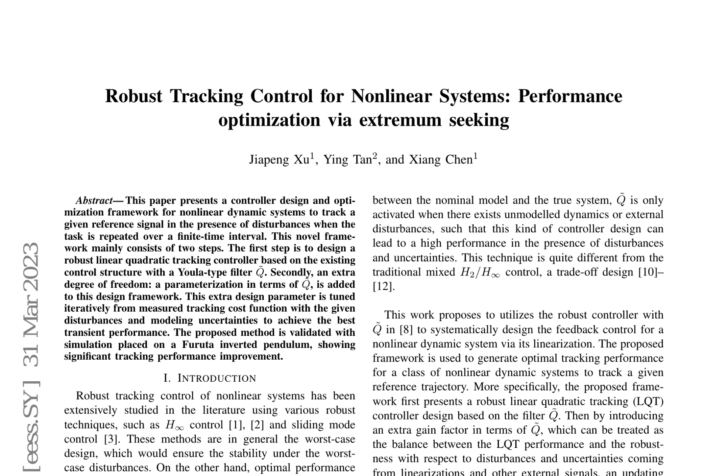The effectiveness of the proposed framework is validated through simulation on a Furuta inverted pendulum, a highly nonlinear and unstable system. Results demonstrate significant transient tracking performance improvement compared to standard LQT and H∞ controllers. The optimal gain factor is shown to be dependent on the nonlinear dynamics, reference trajectories, and disturbances, highlighting the importance of adaptability in robust tracking control.

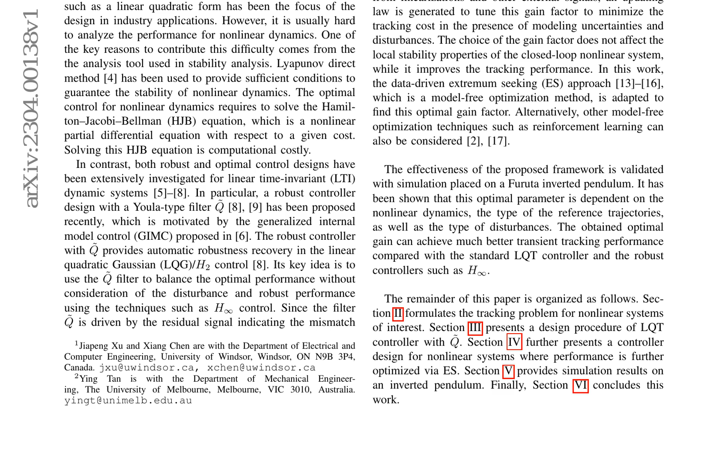The proposed framework offers a robust and adaptive solution for tracking control of nonlinear dynamic systems, with potential applications in various fields, including robotics, aerospace, and process control. By leveraging the strengths of LQT and ES, this approach provides a promising direction for addressing the challenges of robust tracking control in the presence of uncertainties and disturbances.

Nonlinear systems with disturbances and modeling uncertainties are addressed through a robust linear quadratic tracking controller design. The system, comprising a nonlinear plant with a linearized form, incorporates an observer and a filter Q to enhance robustness against disturbances. The control objective is to minimize a finite-time quadratic cost function, ensuring the output tracks a desired reference trajectory. The proposed approach involves a two-step design process.

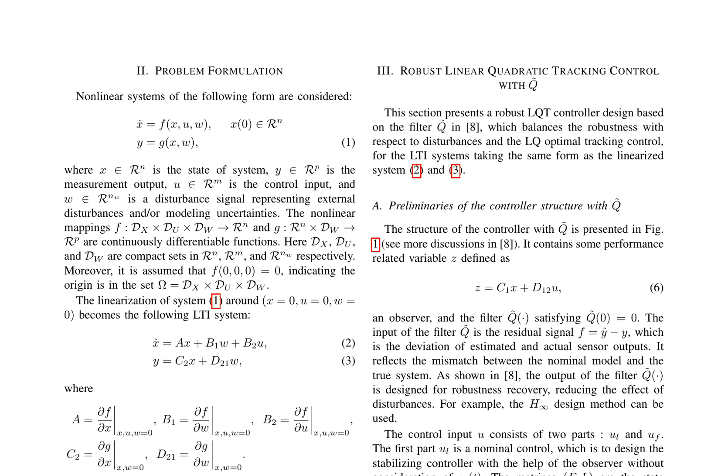First, a robust LQT controller is designed based on the Youla-type filter Q. Then, an extra gain factor is introduced to the filter and tuned using data-driven optimization algorithms, such as extremum seeking. The controller structure consists of a nominal control UL, an observer, and the filter Q. The nominal control UL stabilizes the system without considering disturbances, while the filter Q produces an additional control input UF

to enhance robustness. The filter Q is obtained using standard H∞ techniques for the augmented system with state x, e, where e represents the estimation error. The paper highlights the importance of balancing robustness with respect to disturbances and LQ optimal tracking control. An optimal control input is necessary to minimize the quadratic cost function, which is achieved through the proposed two-step approach.

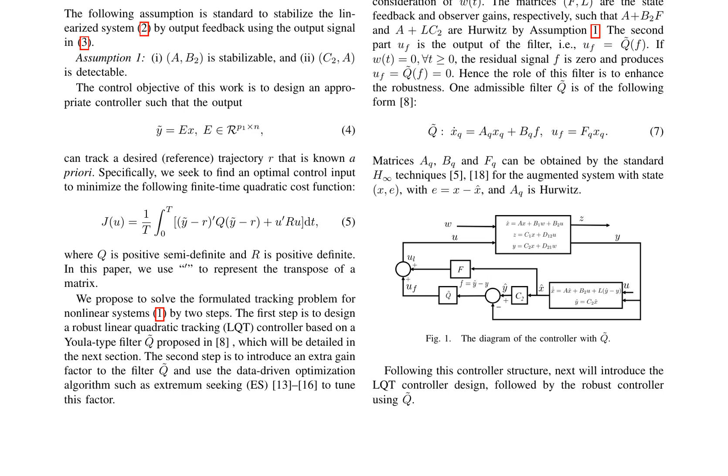The use of data-driven optimization algorithms in the second step enables adaptive tuning of the gain factor, making the controller more effective in real-world applications where disturbances and uncertainties are inevitable. The design of a robust linear quadratic tracking (LQT) controller with a parameterized filter tilde Q is presented.

For linear time invariant (LTI) systems, the optimal control input is derived using the Hamilton-Jacobi-Bellman equation, involving the solution of a differential Riccati equation to obtain the control gain F. In practice, a simplified algebraic Riccati equation can be used to obtain a time-invariant stabilizing control gain.

To enhance robustness, an extra gain factor is introduced to the filter tilde Q, resulting in a new filter tilde Q, allowing for a balance between LQT and robustness. The tracking performance index J(U) is now a function of the gain factor, and the goal is to find an optimal parameter to minimize this cost function.

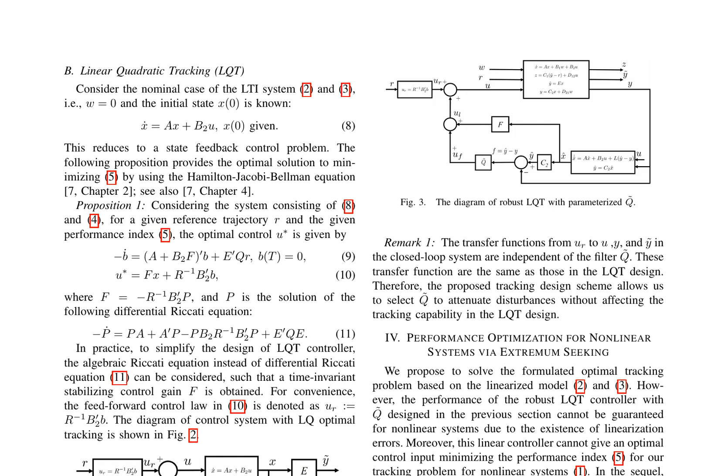To solve the optimization problem for nonlinear systems, an extremum seeking algorithm is proposed. This data-driven approach does not require knowledge of the system model and can be applied online to adjust the control parameters based on real-time data. The ES algorithm iteratively updates the parameter to minimize the cost function J and ensure optimal tracking performance.

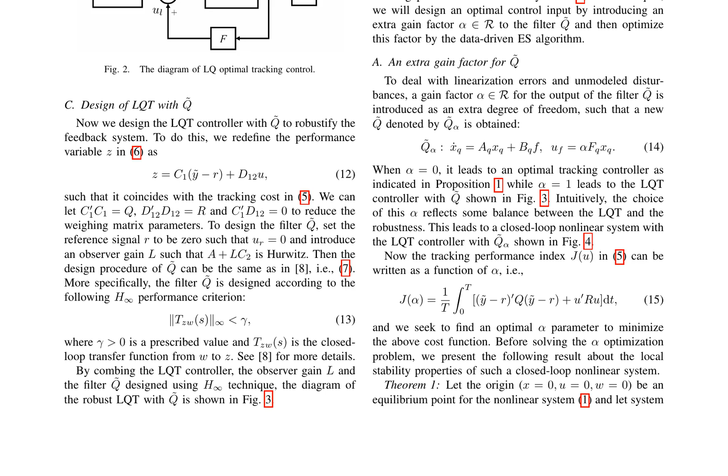Overall, the design of a robust LQT controller with a parameterized filter tilde Q is outlined, which can be optimized using an ES algorithm for nonlinear systems, offering a balance between tracking capability and robustness against disturbances and linearization errors. Designing a robust optimal tracking control scheme for nonlinear systems requires careful consideration of transient behavior in the closed-loop system.

To address this, a linearized model of the nonlinear system around the origin is first introduced, followed by the design of a linear quadratic tracking (LQT) controller with a parameterized tilde Q. Notably, the choice of this parameter does not impact local stability properties but significantly affects performance, particularly in transient phases. To optimize performance, a data-driven extremum seeking (ES) algorithm is employed to tune the parameter for a given disturbance.

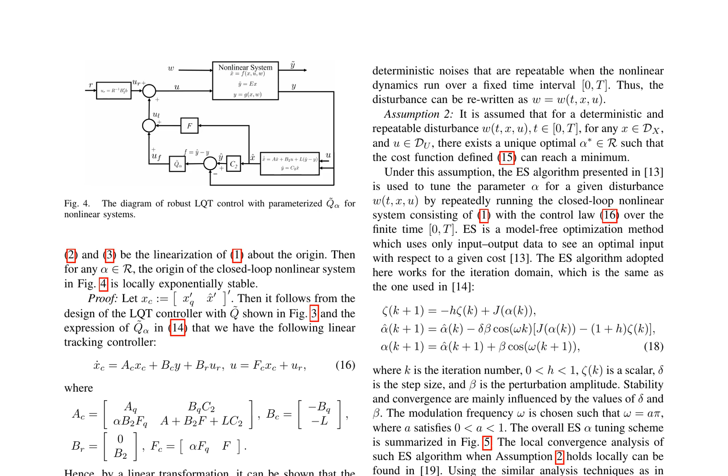This algorithm iteratively updates the parameter to minimize a cost function, defined as J, which is a function of the system's transient behavior. The proposed robust optimal tracking control scheme involves a three-step design procedure: obtaining the linearized model, designing the LQT controller, and tuning the parameter via the ES algorithm.

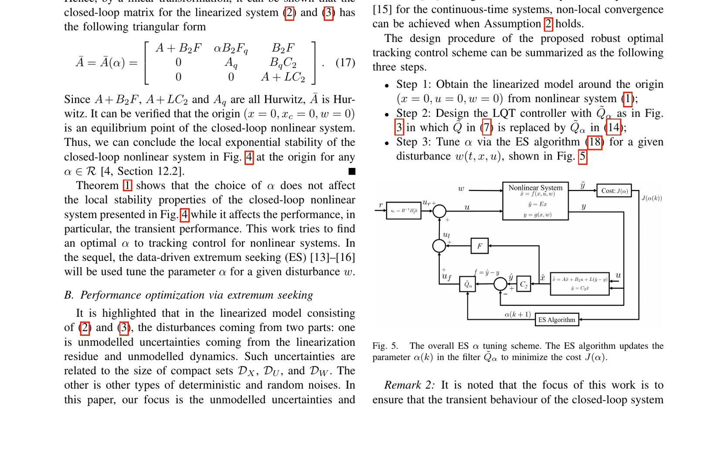It is crucial to account for unmodeled uncertainties and deterministic noises in the linearized model, as these can substantially impact system performance. Assuming a unique optimal parameter exists for a given disturbance, the ES algorithm converges to this optimal value. Figure 5 summarizes the ES tuning scheme, where the parameter is iteratively updated to minimize the cost function J. The primary focus of this work is to ensure optimal transient behavior in the closed-loop system, and the proposed method provides a robust and efficient means of achieving this goal.

This section of the research paper applies the proposed robust tracking control algorithm to a Furuta inverted pendulum system. The pendulum system is modeled using nonlinear equations of motion, which are then linearized around the equilibrium point. A linear quadratic tracking (LQT) controller is designed based on the linearization model, with closed-loop poles and observer gain L chosen to achieve stability. A filter tilde Q is also designed to satisfy the H∞ performance criterion, with a performance bound of 0.21. Simulation results for the Furuta pendulum system under different disturbance signals and reference signals are presented.

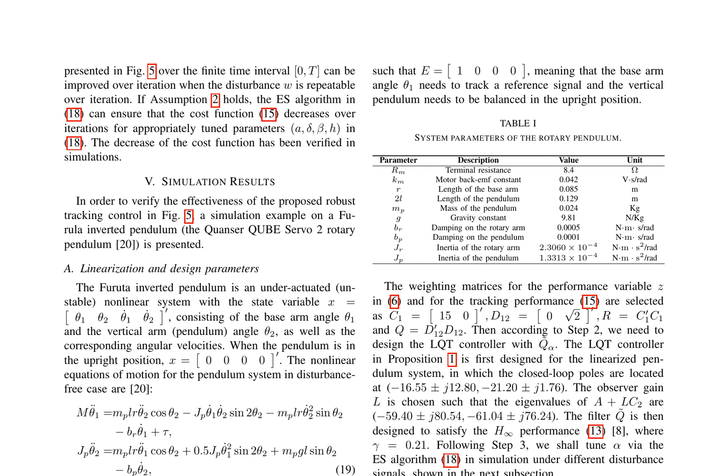Two types of disturbances are considered: a square wave with an amplitude of 2 and a frequency of 0.5 Hz, denoted as W1, and a vanishing signal W2(t) = 5e^(-0.1t). Two reference signals are also considered. Case A tracks a square wave with an amplitude of 20 degrees and a frequency of 0.05 Hz, while Case B tracks a sinusoidal signal r = (π/3) sin(πt).

The quadratic cost function J(α) in equation 15 is used with T = 20 s, and the parameters a, h, and beta in the ES algorithm are set to a = 0.8, h = 0.1, and beta = 0.015. The step size delta in the ES algorithm depends on the specific disturbance signal and reference signal. The optimal alpha tuned via ES is denoted as alpha*. Table 2 summarizes the alpha values in which minimum costs are reached for case A and case B in the presence of W1 and W2.

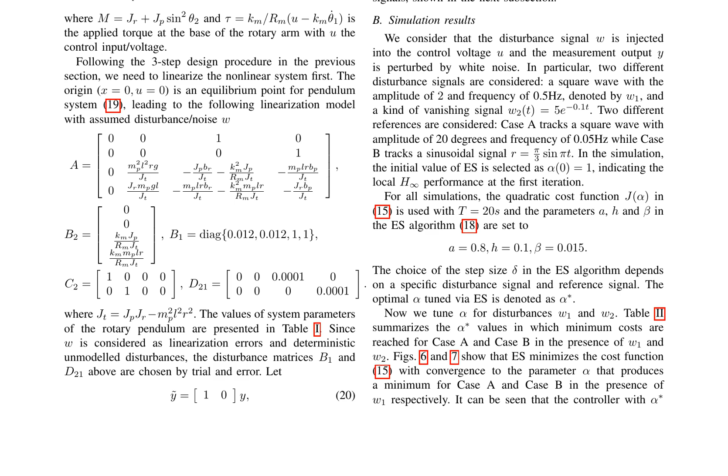Figures 6 and 7 show that ES minimizes the cost function 15, with convergence to the parameter alpha* that produces a minimum for case A and case B in the presence of W1, respectively. It can be seen that the controller with alpha* improves the tracking performance significantly compared to the initial guess alpha0 = 1.

This research paper presents a novel tracking control scheme for a class of nonlinear systems, which are subject to disturbances. The proposed method utilizes a robust controller with a Youla-type filter Q and the data-driven extremum seeking (ES) technique. An innovative feature of this approach is the introduction of a gain factor, alpha, to the filter Q, providing an additional degree of freedom that can be optimized for tracking performance. The simulation results demonstrate that the proposed tracking controller, when combined with a tuned alpha via ES, can achieve optimal tracking performance for nonlinear systems in the presence of disturbances.

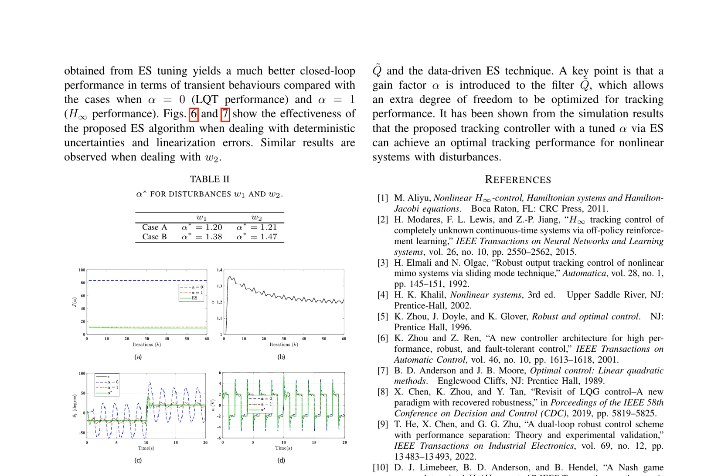A review of relevant literature on control theory is also provided, including robust and optimal control, H2 and H∞ control problems, and extremum seeking control for discrete time systems. The proposed approach is compared to other methods such as LQT and H∞ performance, showing superior transient behavior in the presence of deterministic uncertainties and linearization errors. The paper concludes by highlighting the effectiveness of the proposed ES algorithm in dealing with disturbances and linearization errors, and suggests potential future work in the field of control theory.

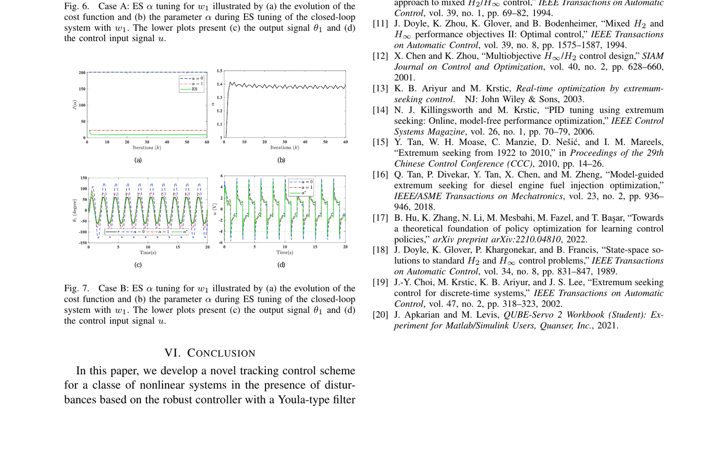The research contributes to the advancement of control schemes for nonlinear systems, providing a new paradigm for robust, high-performance, and fault-tolerant control. This innovative method offers a promising solution for addressing the challenges posed by disturbances and linearization errors in complex systems, paving the way for further exploration and development in the field of control theory.